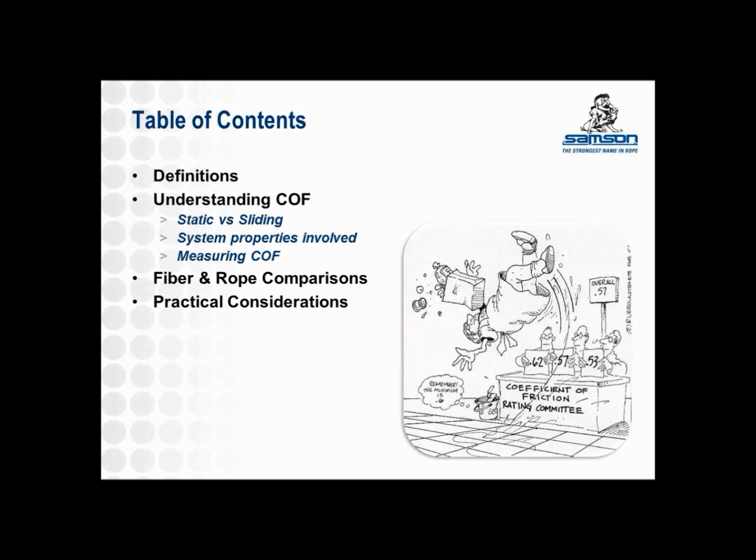So first things first, friction. A pure definition of the term friction given here is the result of microscopic roughness of the two contact surfaces in question, necessitating higher tangential force to cause relative motion between two objects.

So just a quick view of zooming in on what's actually happening at the interface between two objects when they're coming to contact, whether they're in motion or at rest.

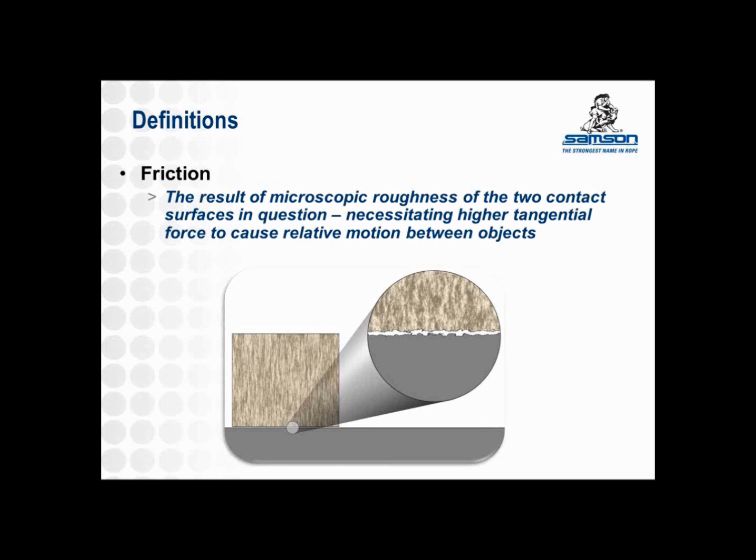The next relevant topic is what is coefficient of friction. Obviously, that's the topic of the conversation today. So at the most basic level, trying to understand the two most simplest forms of coefficient of friction.

For the purposes of our conversation, we'll be focusing mostly on a quote-unquote dry coefficient of friction, or dry friction, meaning two physical bodies coming into contact with each other.

First, the static coefficient of friction. This is the ratio of shear force to normal force between two surfaces at the moment of impending slip. So the important factor there is that last part of the sentence, the moment of impending slip.

This is a representation, a scalar factor that helps represent the grip between two objects that will keep those two objects from moving between each other relative to each other.

The sliding coefficient of friction is that same ratio of shear force to normal force, but instead this is the scalar that is required to keep those two objects in relative motion.

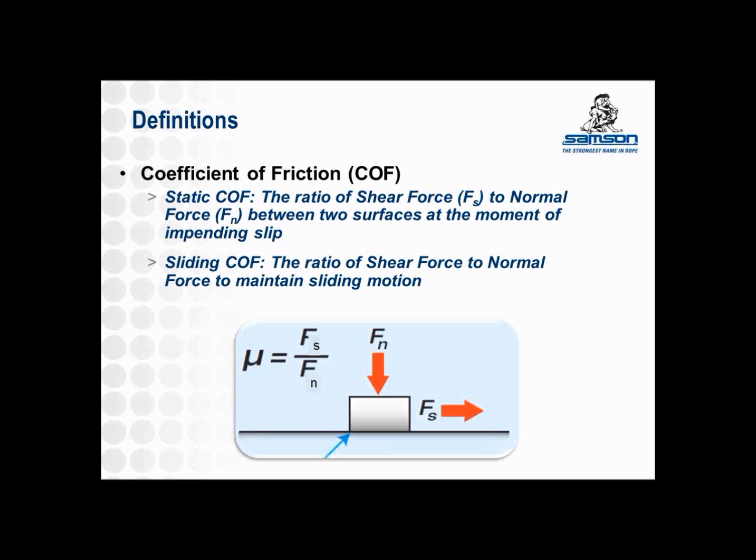Most of our conversation today will focus on the static coefficient of friction, and that'll make a little bit more sense as we go through it. So, static versus sliding - why does it matter?

As we go through this presentation, you'll see the focus of the conversation is mostly geared around maintaining constant grip between a rope, regardless of the rope's construction or fiber type, maintaining that constant grip between the rope and the actual hardware that it's working on.

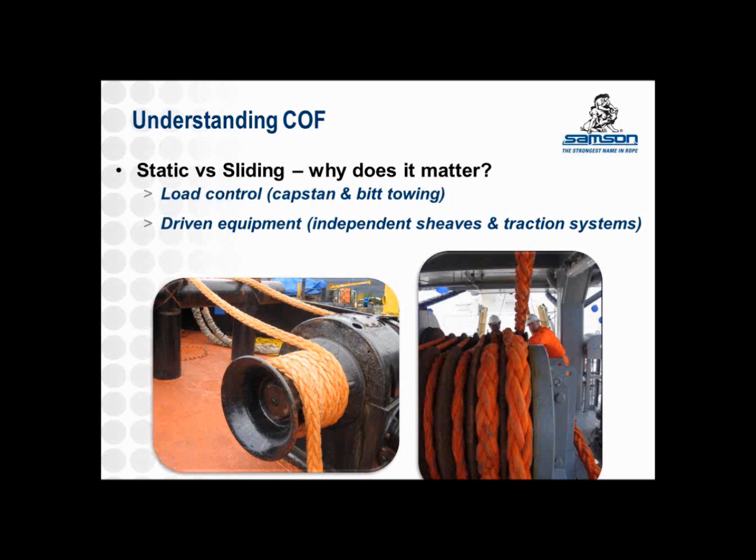So this can be something like a load control device, something like a capstan or a towing bitt, or something more dynamic like driven equipment, independent sheaves, pulleys, or traction systems.

All of these things introduce a lot of variables into the equation when you're trying to understand coefficient of friction. So it's an important thing to make sure that all these variables are at least somewhat understood and taken into account. Some of these system type variables are listed here.

Obviously, this isn't limited to these factors, but these are the primary ones: the contacting surface material, the substrate, ambient temperatures in the environment around the contact, velocity of the two objects. Again, that's kind of been mentioned already, but that's a factor that will change the coefficient of friction. The forces at play, the substrate geometry.

So if you have a round sheave, or even within the realm of round equipment, you have different sizes of sheaves which will change contact pressure, and different surface shapes, and then lubricants involved.

These are things like water, oil, or things that are intentionally used to help decrease the coefficient of friction in different environments. And then there's the set of rope design factors that will influence the coefficient of friction between the two structures, the rope and whatever it's coming into contact with.

The most basic ones, the most important ones to keep in mind are the coating that's used, the construction of the rope itself, and the fiber coefficient of friction, which will largely dominate the resulting rope coefficient of friction.

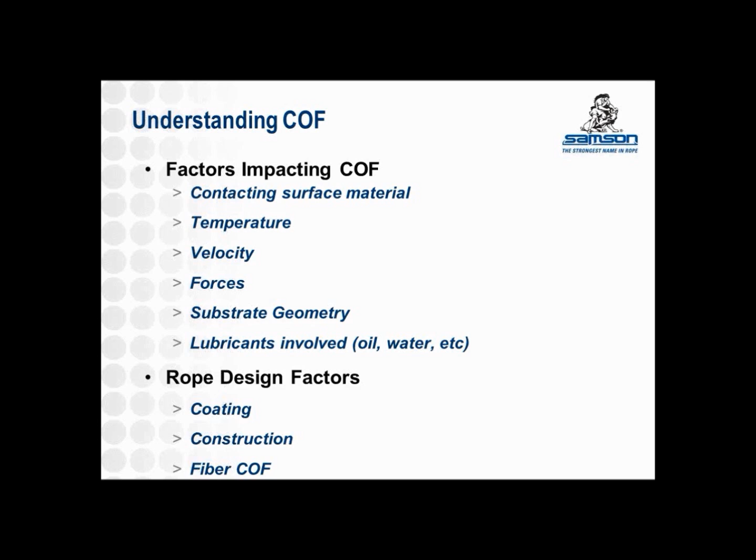So obviously, with a pretty wide list of variables that can impact the coefficient of friction value, it's important to understand that this coefficient of friction is an empirically derived characteristic of two physical entities coming into contact with each other.

So naturally, with that being the case, the test approach and the test conditions are critical to making sure that the values you get represent reality. This is even more important for critical applications where having maximum assurance that no slip will take place is important to the application.

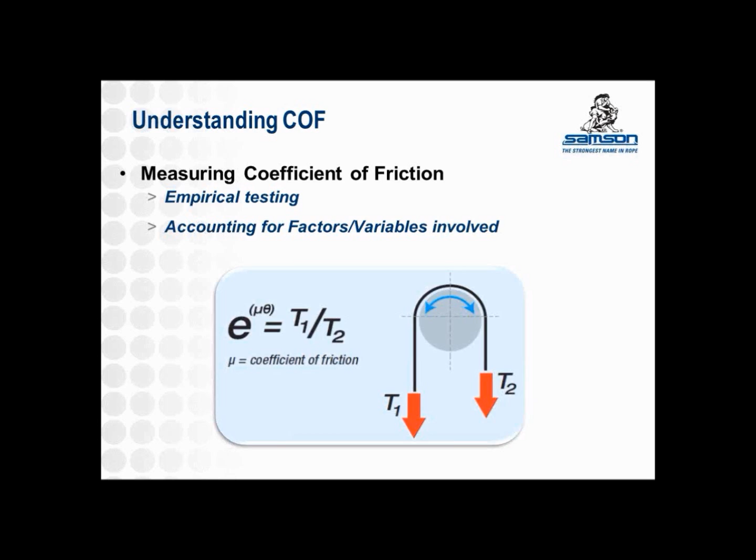This is just a very basic representation of how a coefficient of friction is derived, and as you can see, it has an exponential relationship between the tension applied on one end of the contact and the resulting tension on the other end. We'll talk a little more about that as we go through.

The title of the webinar today mentions the phrase DPX technology, so I think it's important to understand what that is first. A lot of our discussion and the use of these high-performance synthetic ropes in the industries we service—the ropes themselves are built from a fiber called HMPE. A lot of you may be quite familiar with this. There's also common brand names like Dyneema that are used to reference HMPE fiber quite often.

This acronym stands for high modulus polyethylene, and the reason it's so pervasive in so many industries is because it's a very adaptable fiber type. It has extremely high strength and low weight properties, a high modulus, so low elasticity. It can be used in wire rope replacement quite readily. But it has some drawbacks in terms of its coefficient of friction—it's a relatively slick or slippery fiber, and it doesn't like relatively high temperature ranges that other synthetic fibers can handle more easily. We'll show a little more about those numbers in a second.

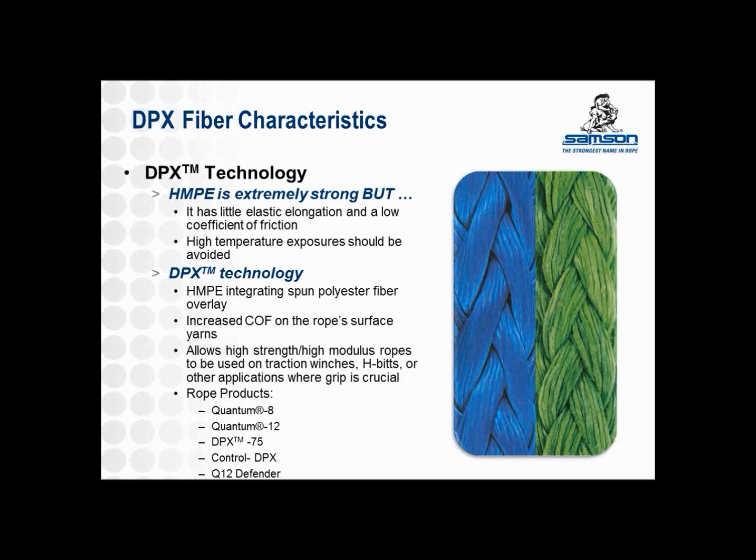Because of these characteristics, Samson developed a fiber technology called DPX several years ago. Basically, it's an HMPE yarn or fiber, similar to what I just described with Dyneema, that incorporates a spun polyester fiber overlay through a patented technology. What this is intended to do is create a new yarn that has a higher coefficient of friction than typical uncoated or coated HMPE. Those yarns are then used on the outer surfaces of any given rope construction—there's several listed at the bottom of this slide—to increase the effective coefficient of friction of the rope while minimizing the amount of strength sacrificed from a surface layer that doesn't contribute to strength as significantly as HMPE would.

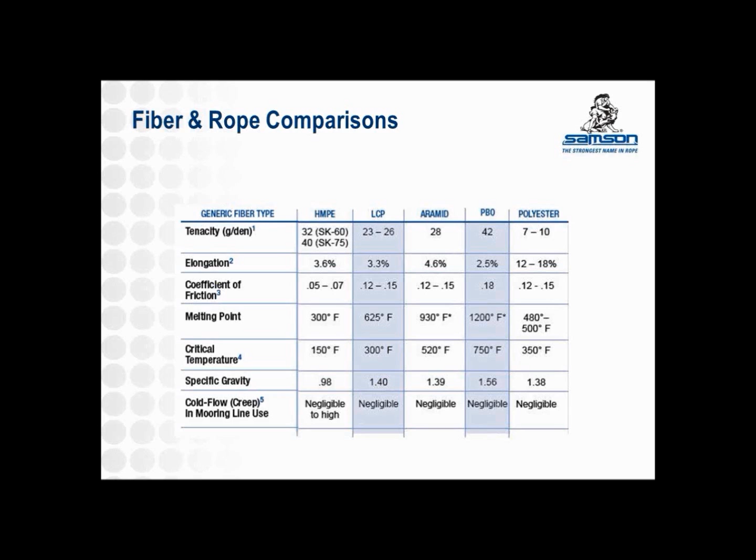The reason this is relevant in our discussion today is because sliding or slipping of a rope against a mechanical surface, like a piece of hardware or a stainless steel pulley, can create significant amounts of localized heat. That heat can then create localized damage to the rope itself, and for critical applications, that simply would not be acceptable in most cases.

So in order to understand how DPX technology can impact the rope or yarn coefficient of friction, I put a quick summary together here showing a basic guideline or range of coefficients of friction for the different types of fibers used in these high-performance applications.

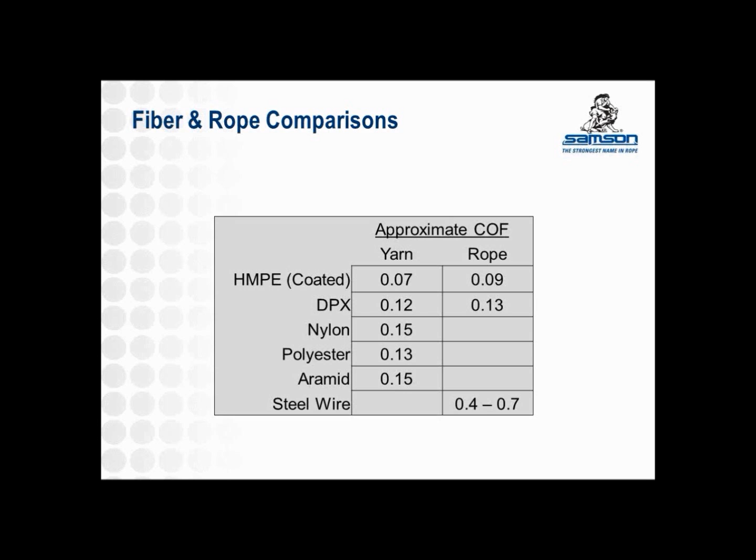As you see, there's a pretty significant jump in coefficient of friction, in both yarn and rope form, when DPX fiber is utilized—getting it more in line with some of the traditional synthetic fibers as well as other high-performance synthetic fibers like Aramid. It's not raised to the level of steel wire, but it's much closer, so that when you're trying to use these ropes in steel wire rope applications or newly designed systems, you have something with effectively much better performance.

The next thing to understand is why does this matter? We want to make sure we take the right things into consideration when designing a system or identifying the appropriate rope product for these different applications. So I've broken it out into three basic categories of applications where this issue becomes relevant.

The first one is what I've called handling by personnel. This means that the tension shown, illustrated with the red arrow going out, the working tension in the application, is going to be relatively high.

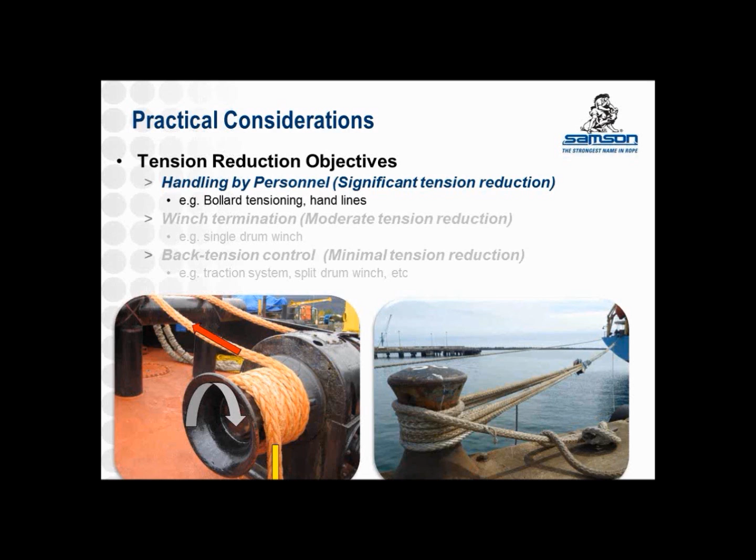Different applications have different values, but let's say in the order of 50 to 100 tons or 20 to 30 tons, you're working with a relatively high working tension. In some applications, it's necessary that personnel handle the lines on the back side, as you see indicated with the yellow arrow on the left-hand image. So the tension reduction between working load and the back end of the friction device is significant. In order to reduce that tension dramatically, you need a relatively high coefficient of friction to avoid that tension transferring all the way through the system. This will make more sense as we go through the next couple slides.

The next category is what I've called winch termination, just as a means of simplicity. What I mean is there's a more moderate tension reduction required simply to avoid having full working tension come onto the connection point to another piece of hardware. There are a couple photos here representing examples where either on a split drum winch you don't want full working tension going into the storage drum, or you see a pass-through on a winch flange where the connecting rope is a much smaller, lower strength piece of rope used to make sure the rope doesn't come unspooled under certain working conditions. Again, those tensions expected in those conditions are much lower, so you still need some tension reduction from working load to hardware contact, but it's less significant than with handling by personnel.

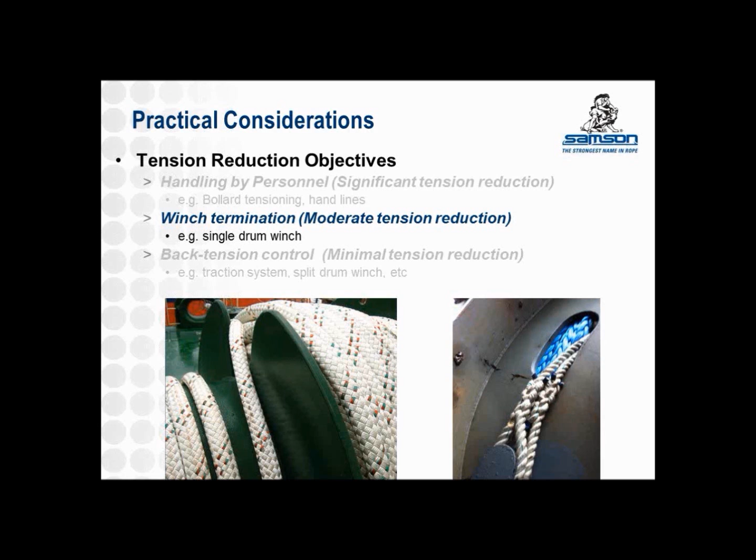The next topic is back tension control. This is not necessarily as common, but it's often more critical. You see in the image below a traction winch system, and the back tension in this system doesn't necessarily need to be handled by hand or be severely lower than the working tension. However, it does need to be consistent. So maintaining consistent contact on the driving sheaves or driven sheaves of a traction system is critical to maintain constant tension on the back side of the system for spooling, reeling, or any other kind of handling or storing.

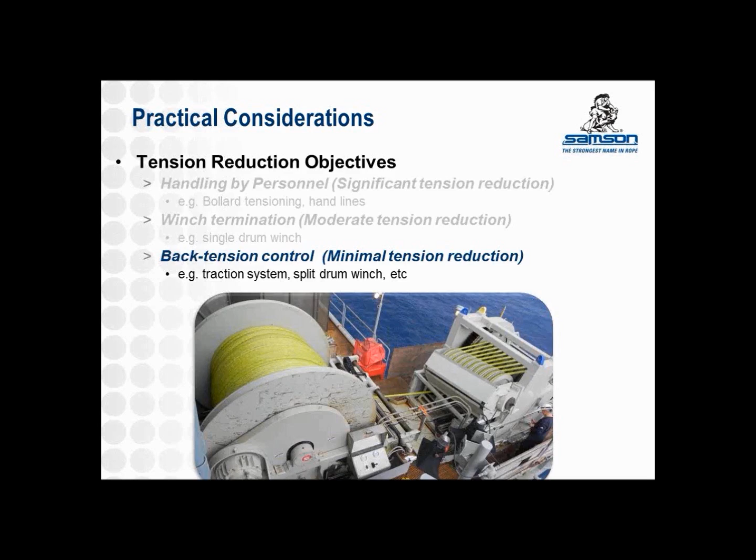In order to put all of this into perspective between those three different categories, I've tried to put everything into one chart here for review. What you see on the horizontal axis is the representation of coefficient of friction, and on the vertical axis, the number of wraps required to maintain static conditions. This is in order to prevent slip, a rough estimate of how many wraps or turns on a piece of hardware, whether that's a sheave, a capstan, or otherwise, may be needed to maintain that pre-slip condition.

What you see on the chart is two vertical buckets of ranges of coefficient of friction that you may see in typical HMPE ropes used throughout the industry. Comparatively, HMPE with our DPX technology on the surface shows what those rope coefficient of friction properties typically would be, a re-representation of what we showed in the chart earlier. So you can see from the chart, looking at the HMPE category, the number of turns for these types of products may be in the range of 15 to 20 turns. That sounds like a pretty significant number. However, if you look at the comparison with HMPE with our DPX technology, that same condition or performance requirement can be satisfied with something more along the lines of maybe 8 to 10 turns on the same system.

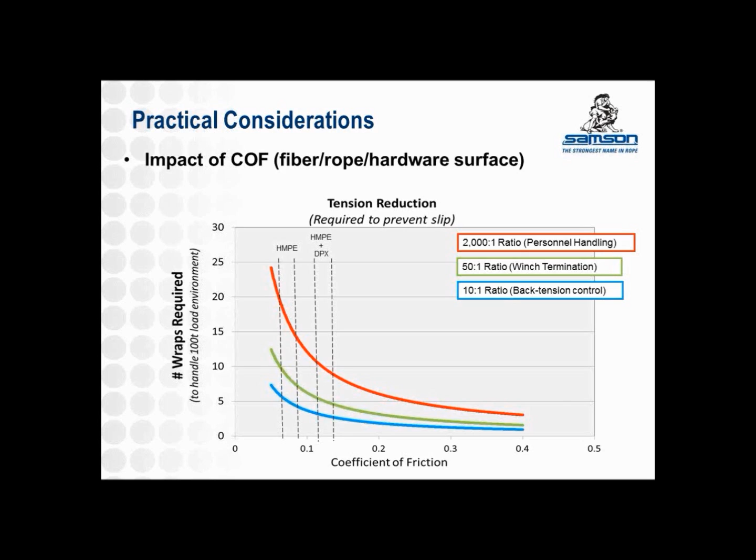Similarly, you can compare how that needs to be handled or considered in the design phase for a back tension control system like we showed on the last slide, with the number of sheaves in the traction system being something on the order of 4 to 6, as opposed to 3 to 4. Hopefully that helps describe the comparative differences and how it can impact both design and product selection considerations.

I think a lot of the conversation we've been having so far has been geared around preventing slip. And I mentioned earlier the concern about slip creating high heat generation, localized heat generation at the interface.

This is a pretty intuitive topic. I think most people would kind of understand that, but it's still worthwhile putting it into mathematical context and making sure it's understood that what's effectively happening here is heat is being generated as energy is being dissipated through that contact, that relative motion between the rope and the hardware.

This is in a situation where slip has occurred. So by preventing slip, you basically take the relative value of the velocity, represented here as v, to 0. And in turn, you're eliminating heat generation or significant heat generation because the other variables in this equation are quite constant. The difference in tensions between the working tension and the back tension in most of these systems should be relatively constant as long as slip is avoided.

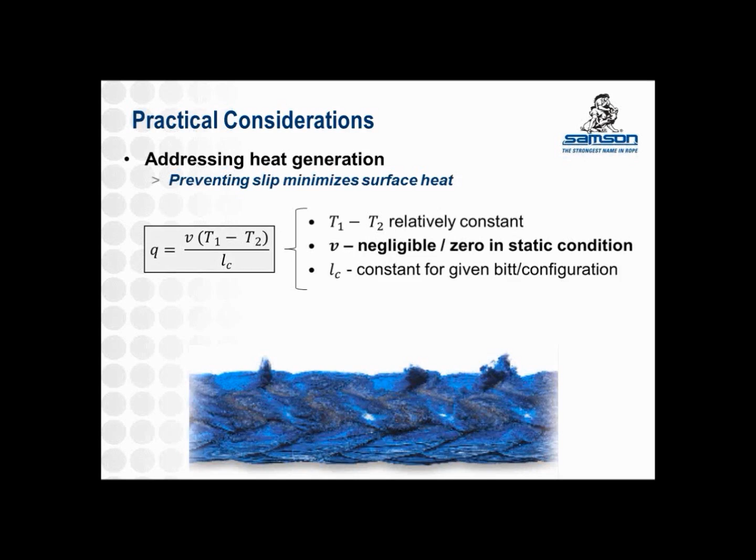So the next thing to consider would be hardware design. In order to do so, I think one of the first things to do is make sure we understand all the variables at play impacting the hardware and the forces that could potentially cause damage to these hardware pieces, regardless of what type of hardware we're talking about.

And in doing so, you approach a situation where you risk that the hardware design may not be sufficient to handle those hoop stresses, and you risk potential collapse or compression of the actual walls of the hardware structure.

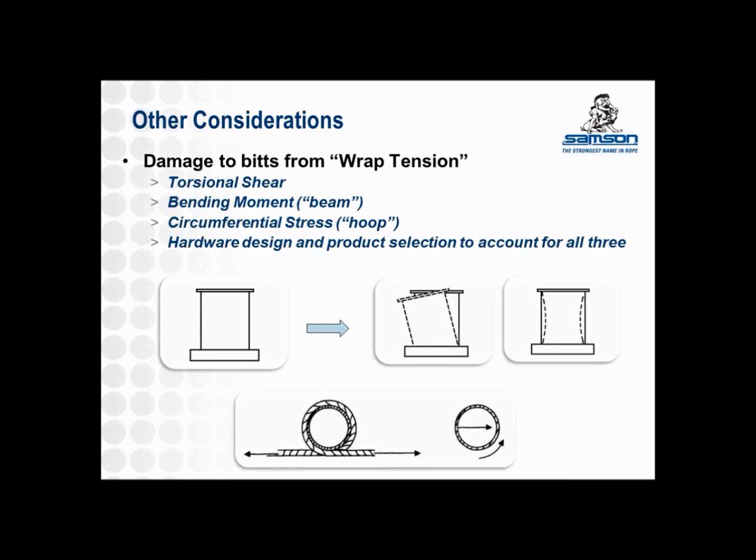As a very vivid example of this, many of you in the marine industry may have seen something similar in the past. This is a fairly common scenario we see with the relatively high strength of these HMPE rope products. One of the downsides is as that circumferential hoop stress gets imparted on these pieces of hardware, the lower the coefficient of friction of that rope is, the higher the hoop stress is going to be.

So if these pieces of hardware have been designed to resist beam bending, so in order to resist the bending of the whole bollard structure, for example, they may or may not have taken into account wall thickness in these designs sufficient enough to avoid that hoop stress causing potential collapse.

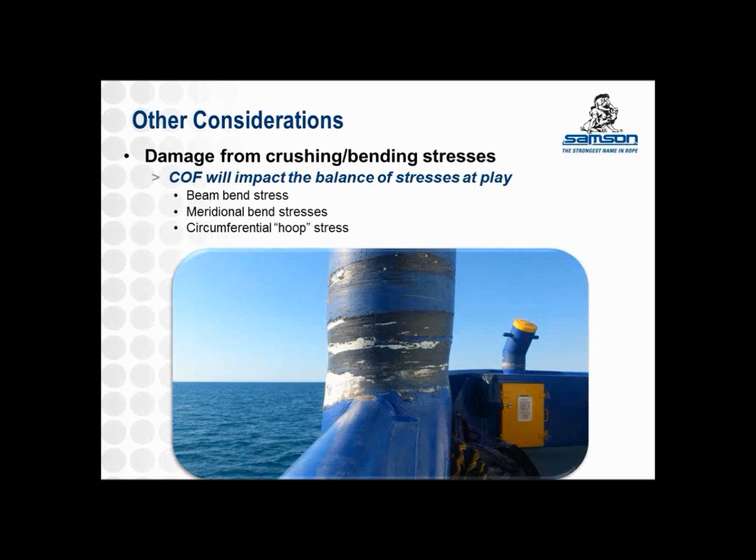If you're using a relatively high coefficient of friction rope, as that coefficient of friction increases, your level of grip on those first layers is relatively high. And in turn, the T2 value that you see on board the vessel is as low as it can be.

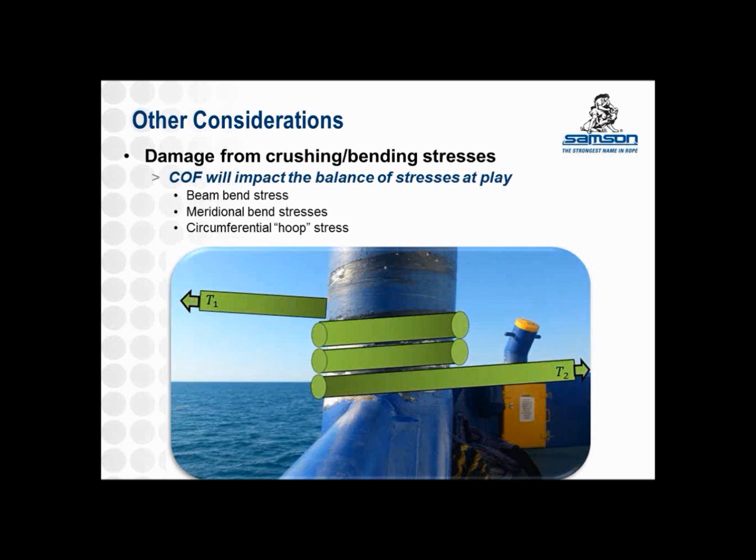However, as that coefficient of friction approaches lower values, and let's say for the sake of argument approaches 0, you get a situation where T1 then approaches T2, and the stresses at work on the hardware are approaching purely circumferential hoop stress. In this case, the design of the hardware is critical to assuring it can withstand that hoop stress. And alternatively, the rope product selection is important to avoid a situation where that compression is so high due to the fact that the tension on the working side of the system is transferring all the way through to the back tension side.

The other type of system consideration is a bit more straightforward, but also very important. When you're dealing with these ropes driving relatively large equipment, relatively large and very heavy pieces of mechanical equipment, it's important to ensure both that the coefficient of friction is sufficient to avoid relative slipping, and that the system is designed to allow for freewheeling turning based on the planned coefficient of friction and friction force that's going to be applied by the product itself.

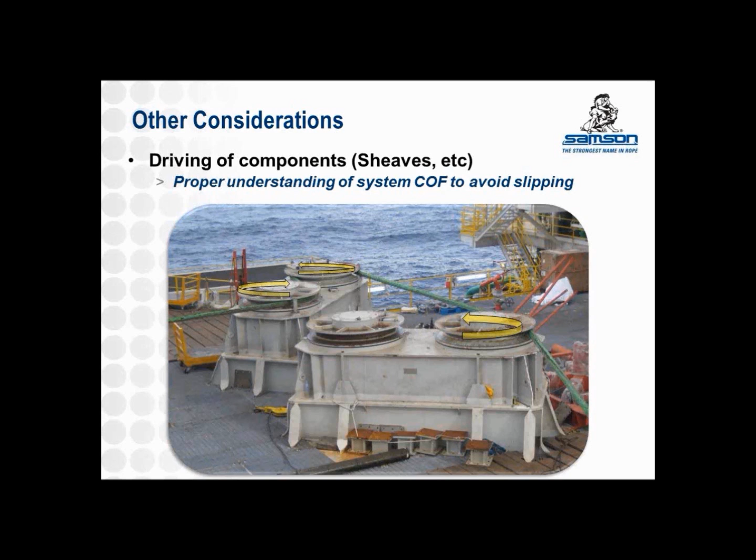So in conclusion, there's several components to this topic that should all be taken into account. The design considerations, the system versus the rope. Both approaches need to be taken into account.

The appropriate rope coefficient of friction will, in fact, impact performance, as most of you know. But at the same time, on the design side of the hardware or the system that's being used, careful consideration can be used to help avoid any potential conflict with whichever rope is being used in your given instance.

The prevention of slipping is critical to avoiding rope damage, so both on the product selection side, making sure that you're picking a product that won't slip, but on the usage side, making sure that you're maintaining proper number of wraps to avoid that slipping given whatever hardware and rope product you're actually using.

And critical to both safety and total cost of ownership, it's important to avoid hardware damage through product selection and proper design considerations, as we've been talking about throughout this presentation.

Samson can help with those types of considerations for more critical applications where specific physical parameters need to be checked to assure that the most accurate system is being designed. And obviously the DPX technology that we've been talking about allows for this added control in the use with HMPE ropes with minimal sacrifice to other performance properties like tensile strength, abrasion resistance, and others.